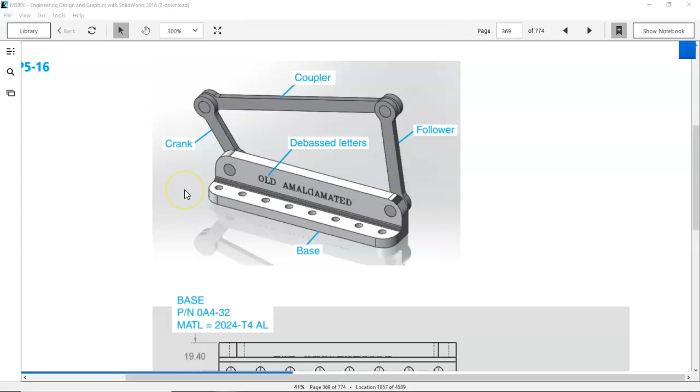So just looking at how this is going to operate, we start to get an idea of the functionality. One of the things that jumps out reading through their description is the 2024, and I have a quick reference, McMaster-Carr, for material, and you have the descriptions. Let's see, that's the 6061. I need the 2024. All right, so you can get the yield strength, 47,000. Quick description is aircraft design, high strength to weight, and I think the issue is the corrosion resistance compared to the 7075.

The main thing here is that I've picked 1.75" by 1.75" because the material, well, we'll get to that, is about 1.75". So just comparatively, about a foot is 101, and we come over to the 6061 and we lose a little bit of the yield strength, which, looking at this part, if that 12,000 psi makes a difference, we probably shouldn't be making this out of aluminum anyway. So we're at the 1.75", and looking at a piece of 1.75", we're at $43. So probably, I can just say 40% of the cost of the 2024.

So if you have a specification you have to meet, or that's what's required, then great. The other thing is the availability of different sizes. So the 1.75", we could actually go down to 1.25", because the base is 30 millimeters. We would be at 28.59, which is 30% of the cost. So always take those things into consideration.

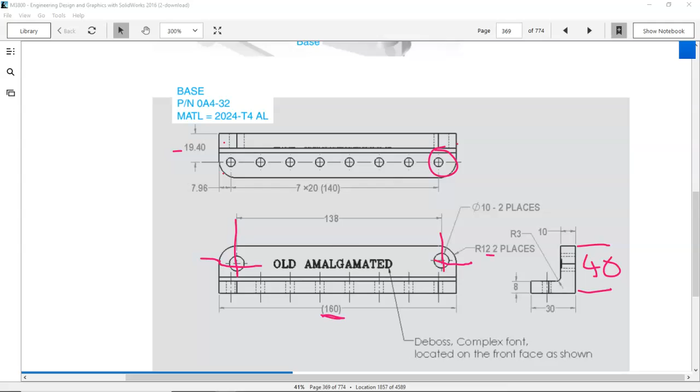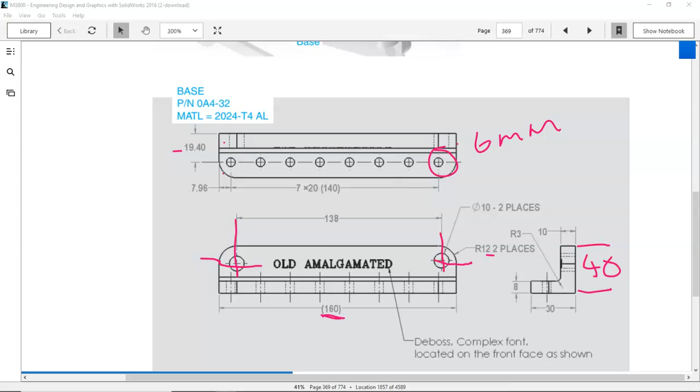So, it just depends on how we're going to mount this and what those holes are really going to do. All right, so we got the 10 millimeter two places. We'll get into it and see if there's anything else. So let's clear the drawing and I'll jump back into it.

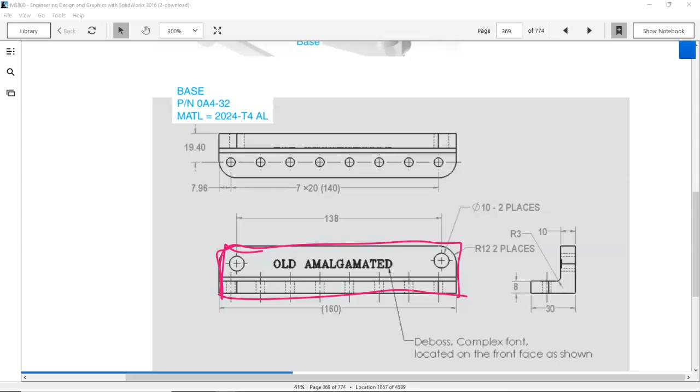All right, so for the speed run or the fast, pay attention, listen to the terminology, see the techniques. We're going to draw, and actually I need to square that off. We'll use the fillet. We're going to draw a rectangle this way and extrude back, or we could draw the rectangle this way and extrude up, or we could use the whole thing and extrude to the first level and then draw the rectangle and extrude to the next level. All right, all of those are perfectly viable. It depends on what you see.

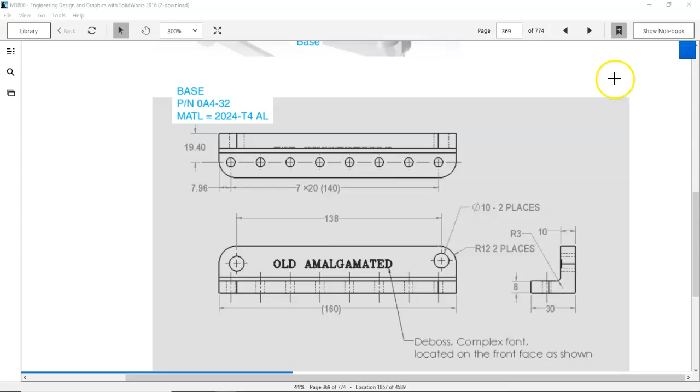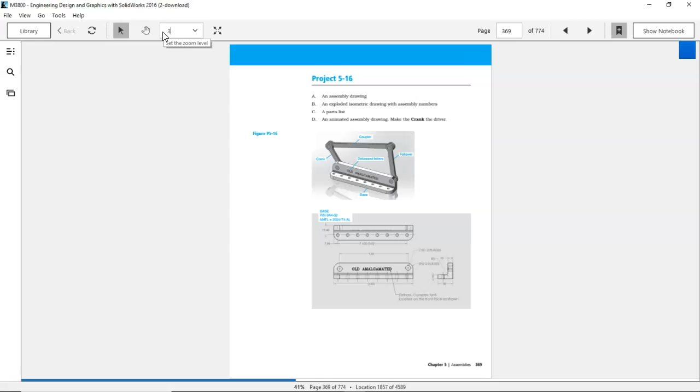For the actual instruction, what I'm going to have you do is we're going to, and I didn't want to do that. So one of the reasons I'm using the 2016 Kindle version is that the zoom is a lot better than the 2019 version when I don't get too carried away with the sketch. So let's make sure that we're sketching.

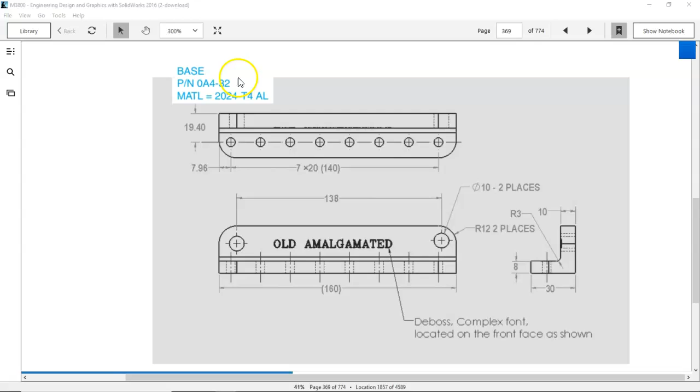So if I draw this outside profile with the 8 and the 10 and extrude it over the 160, then I can get a majority of that geometry, but I want you to see different ways to plan your approach. All right, so that pretty much takes care of our first piece. We'll name it base. We're not going to be concerned about part numbers or any of that just yet.

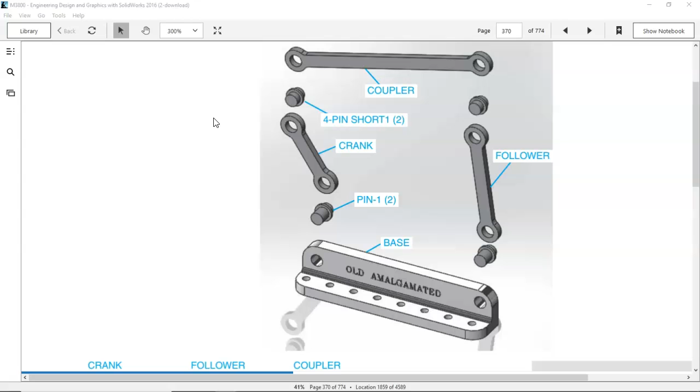So the exploded view, when we get to the assembly, exploded views live in the assembly. They do not live in the drawing. So we will be able to activate and use the exploded view out of the default configuration in the assembly.

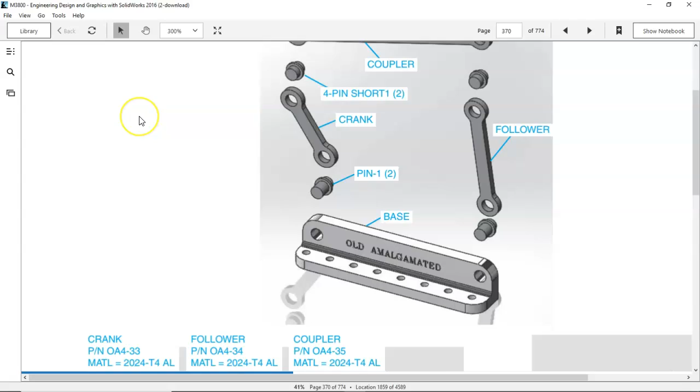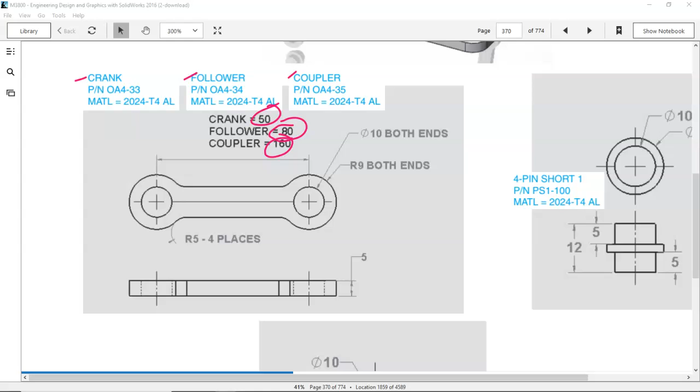Our 3 parts for the crank, the follower, and I tried to sketch again. So let's zoom that up again and back. So pretty much we're going to draw this shape, but we have the crank, the follower, and the coupler, and they're all being shown as 2024 aluminum. The crank is 50 millimeters, follower 80, and 160 on the coupler. So what that tells me is I'm going to be able to draw one of these, model the part, and then go in and do a save as, and just change dimensions if everything else is staying the same.

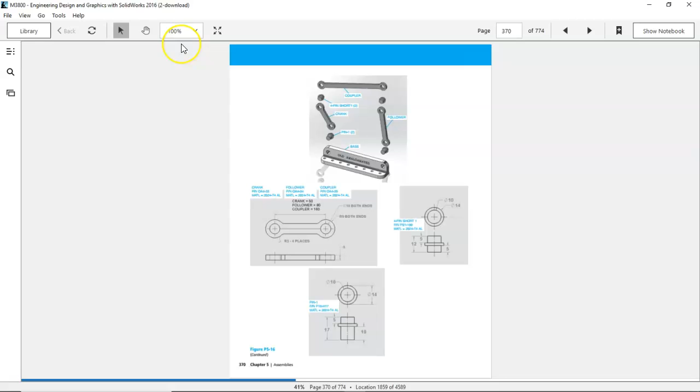Pretty much the same with our pins. We have the short pin, and if we do this as a revolve, then I will be, and I forgot to do that again, so getting used to the sketching and clearing it is going to be interesting. All right, so into the sketch. So when we look at the revolve, we're going with this geometry, which is basically looking at this quarter section. Let's see, I think we want to do it that way. All right, so looking at the quarter section that way.

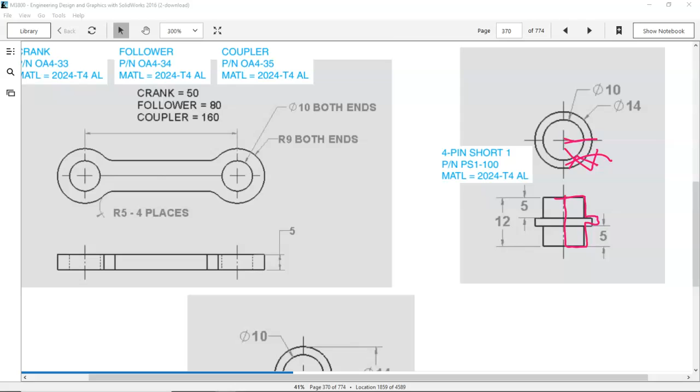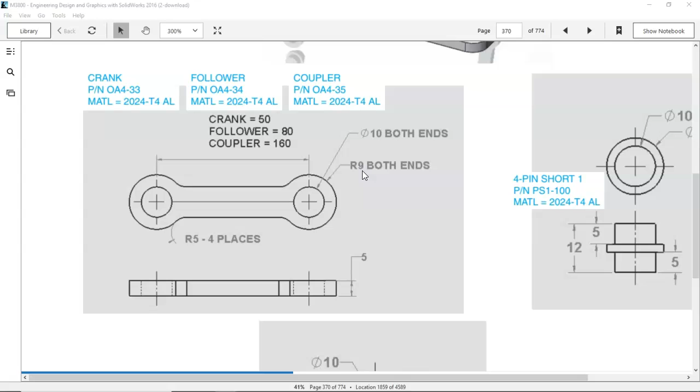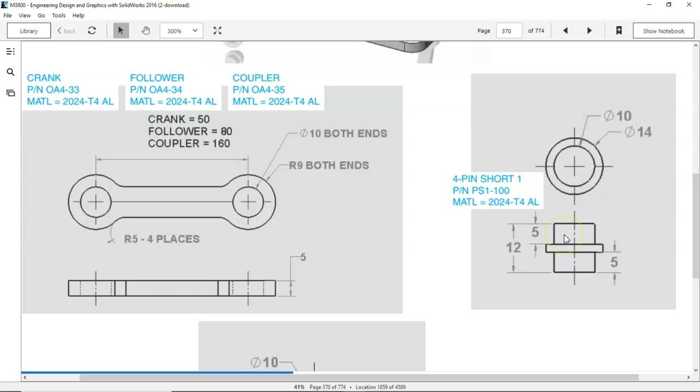And since this is the same, we'll be able to do the save as. So anything we can do to be more efficient, manage our geometry. Looking at those, I didn't see any missing dimensions. Radius of 5. And we'll probably end up creating the models pretty much the same way for both. I will just go a little bit slower on the instruction video. And the pins, may try the wedding cake approach and stack these up. And then for the instruction, we'll do the revolve.

So anyway, just kind of a quick overview, things to look at. Anything that jumps out at you that could be an issue, now's the time to start thinking about it.